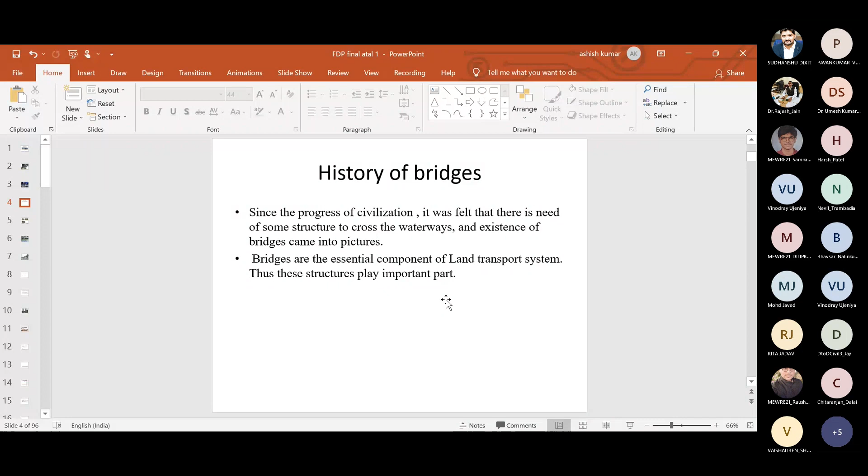Anyone? Yes, sir. Yes. Okay, so these are some...

If we talk about the Tarr Steps bridge, it consists of 17 giant slabs, totaling 180 feet long, and is considered the best example of a clapper bridge.

According to local legends, the Tarr Steps were built by the devil so he could sunbathe on the stones. The bridge has been damaged in recent years by flood waters but has been rebuilt. So that is a kind of bridge.

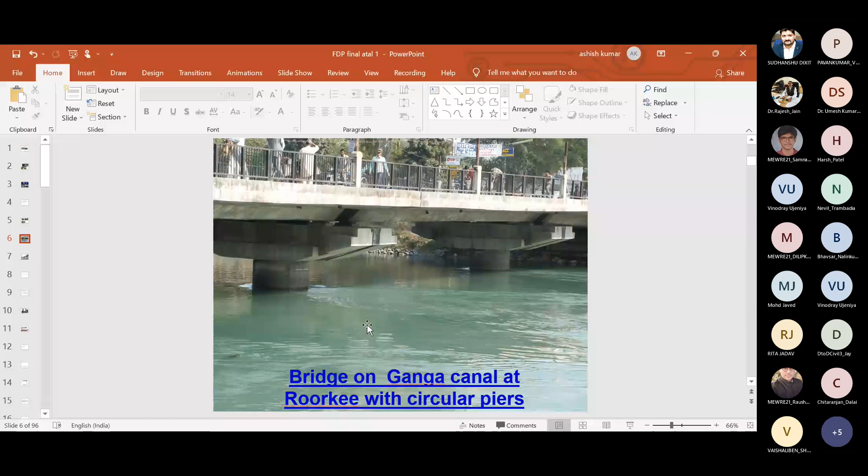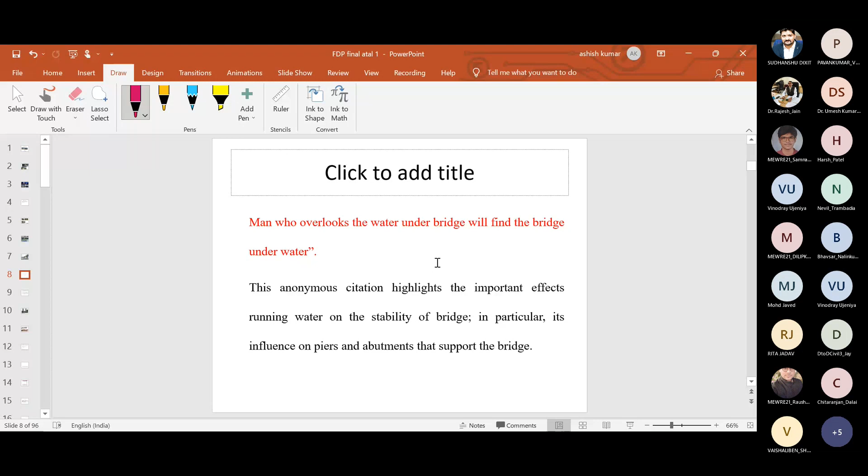So what I was discussing is that the man who overlooks the water under bridges will find the bridges underwater. This is a famous citation and quote that reflects the importance of running water on the stability of bridges. If we overlook the power of the water, the momentum of the water, and go with the design by overlooking the water phenomena, then probably we will lose our bridge and find our bridge under the water.

So that is what we were discussing about the phenomena of scouring, which occurs around bridge piers, and probably that is playing an important role in the safety and stability of the bridge. So that is one of the main causes of bridge failure - the flow around the piers and the abutment.

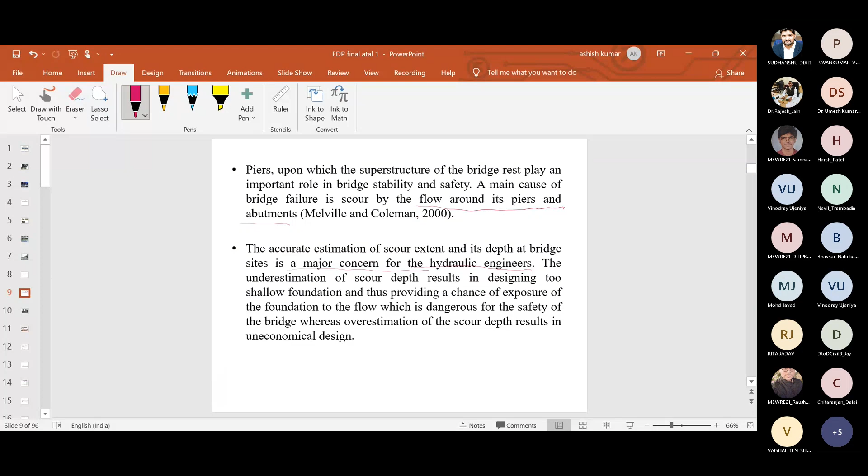Accurate estimation of the scour extent and its depth at the bridge site is a major concern for any hydraulic engineer. If we do the calculations for the scour depth and it is underestimated, what will happen? Our foundations will be exposed during the flood flow phenomena, which will ultimately be dangerous for the safety of the bridge. Whereas if we overestimate the scour depth, it will result in an uneconomical design.

So for study, I have taken the first study made by Wardhana and Hadipriono in 2003. They analyzed the failure of 503 bridges in the period 1989 to 2000 in USA, and observed that one of the primary causes of failure was due to flood and scour, followed by collision from vehicles. They reported that around 52.88% of bridge failures occurred due to flood, including the phenomena of scouring.

Similarly, one study has been carried out in India also - R.K. Garg et al. collected information on road and railway bridges, accounting for around 2010 bridges, with sources from print media, the internet, and other government officials' records. They collected data from 1977 to 2017, and as per their analysis, the failure of bridges due to flooding and scouring was more than 51%.

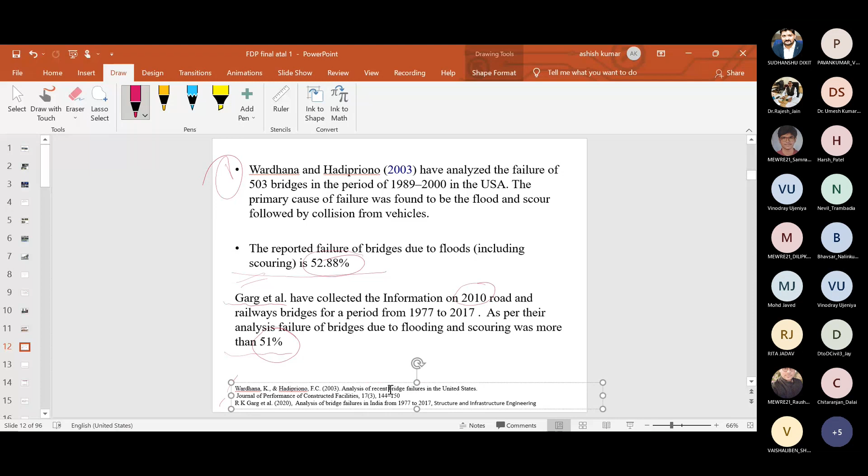So the concern about safety of bridges with scour is primarily due to these reasons: we still have inadequate knowledge about the scour phenomena, and we have inadequate data on bridge and abutment scour, particularly during the passage of flood. Lastly, the size of wagons and trucks and their frequency has significantly increased, which has increased the load on the bridges.

So that shows the need for sincerity while designing the substructure part of bridges. Whereas if you see, mostly when we are designing the superstructure part, we are taking care, we are using different softwares.

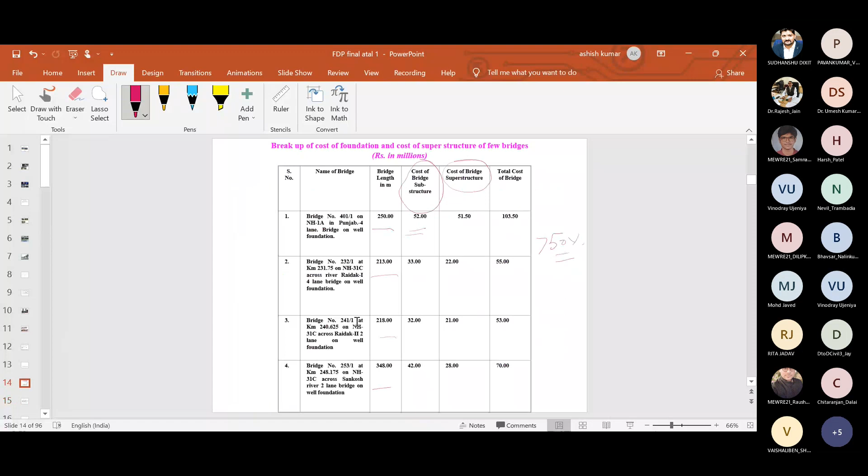Now we go with the phenomena of scouring, and we will then go further with the flow structures around the bridge piers. One of the main causes of bridge failure is scouring of the pier at its supports.

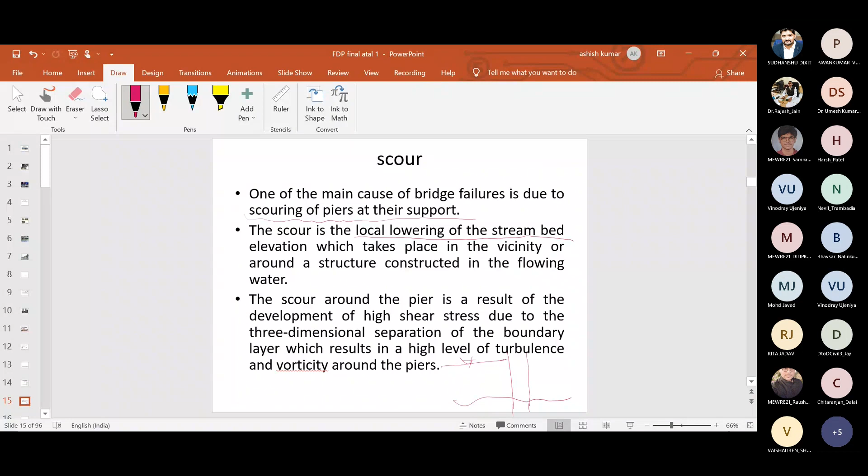What is scour? Scour is the local lowering of the stream bed elevation, which takes place in the vicinity. If you are having flowing water, and if we place our bridge pier, then erosion occurs around this structure. So this is basically a local phenomenon occurring in the vicinity or around the structures, generally lowering the bed level.

So the scour around the pier is a result of the development of high shear stress due to the three-dimensional flow separation of the boundary layer.

Now scour needs to be differentiated from the other term, degradation. Degradation takes place when the transport capacity of the flow for sediment is greater than the rate at which sediment is being supplied from the upstream. So if the supply of sediment from the upstream is less, then there is degradation and lowering of the bed level.

If this is the bed level, and this is the depth of flow, and sediment transportation coming is less in the flow, then what happens? Any river has its fixed capacity to carry the sediment.

So if it is having less sediment transport, suppose we have created some structures upstream of the bridges, like a dam or retaining structures, which has stopped the water carrying sediment, stopping its silt, then what will happen in the downstream of this barrier or dam or any other retaining structure?

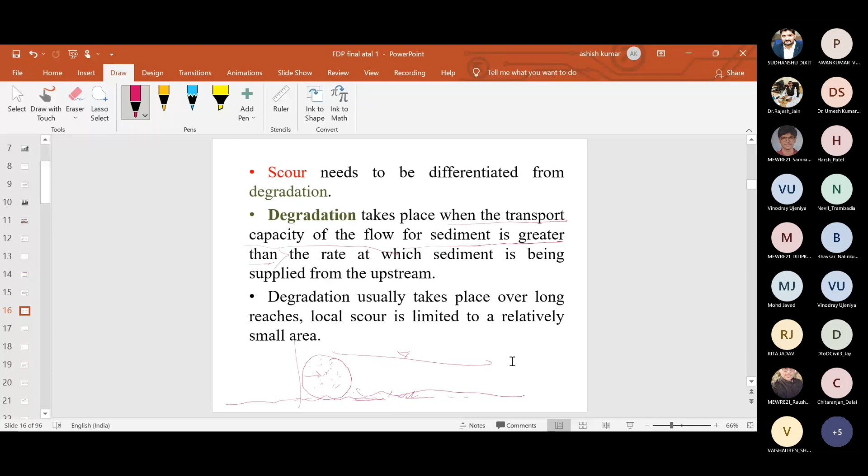So in the case of bridges in alluvial rivers, estimation of the correct depth of scour below the stream bed is important, as it is required in order to find out the overall depth of the foundation.

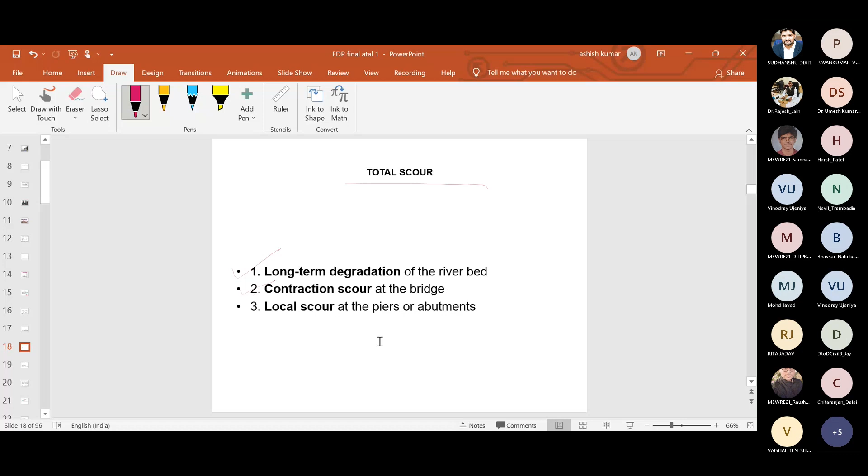Now we come to this: what is the total amount of scour? We have divided it into three categories. First is the long-term degradation, that is of the river bed; second is the contraction scour; and third is the local scour, which takes place in the vicinity of the pier or other structures. We will discuss each one by one.

So first we have aggradation and degradation. What is that? Aggradation or degradation of the stream bed elevation is basically a long-term phenomena, and these changes, as I told you earlier, are due to natural or man-induced causes. Suppose you create some structure like a dam, then as you have made some changes in the river phenomena, this aggradation or degradation will take place. This can affect the reach of the river on which the bridge is to be located.

Now if we talk about aggradation, it involves the deposition of material eroded from the channel or watershed upstream of the bridges, but is not considered a component of the total scour. If we go with degradation, that involves the lowering or scouring of the stream bed over relatively long reaches due to a deficit in the sediment supply from the upstream. This is the important part: there is a deficit in sediment supply from the upstream, and it basically contributes to the total scour.

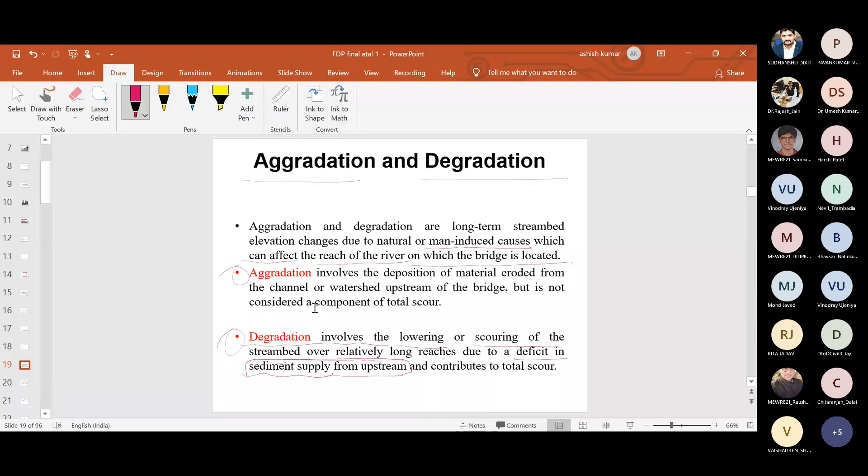Now go with the contraction scour, which is the second part here. Contraction scour is basically lowering of the stream bed across the stream or waterway bed at the bridges. This results from contraction or constriction of the flow.

Suppose this is the river here, and you constrict it by creating some abutment, and then you create some bridges here. So while you are creating contraction in the flow, what will happen? That will result in removal of material from the bed across all or most of the channel width.

This contraction scour is different from long-term degradation, in that contraction scour occurs in the vicinity of the constriction or bridges, and may be cyclic or related to the passage of the flow. So whenever there is a constriction of the river bed or river width, this phenomenon occurs.

The third type is local scour, which is the removal of material around the piers, abutments or spurs, and it is caused by acceleration of the flow and resulting vortices induced by obstruction of the flow.

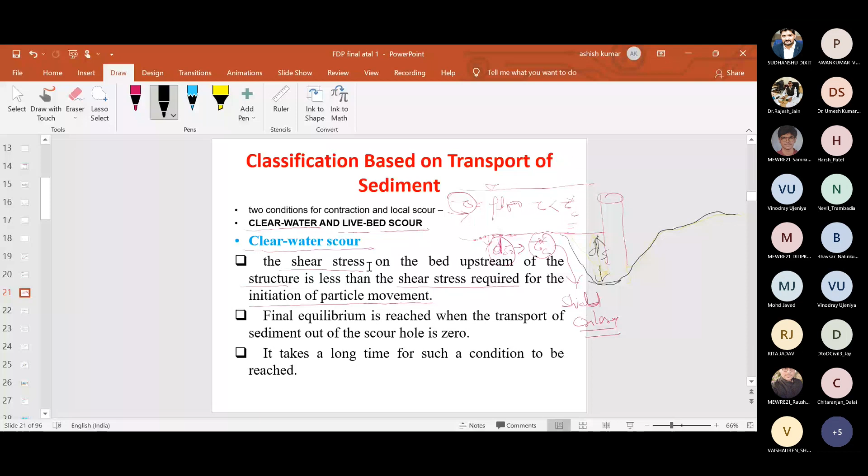So these are some typical clear water scour situations. First, we have a bed with coarse bed material streams. Second, the flat gradient of the stream during low flow, which also depends on how much slope of the bed you are having. Then the local deposits of larger bed materials that are larger than the biggest fractions being transported by the flow.

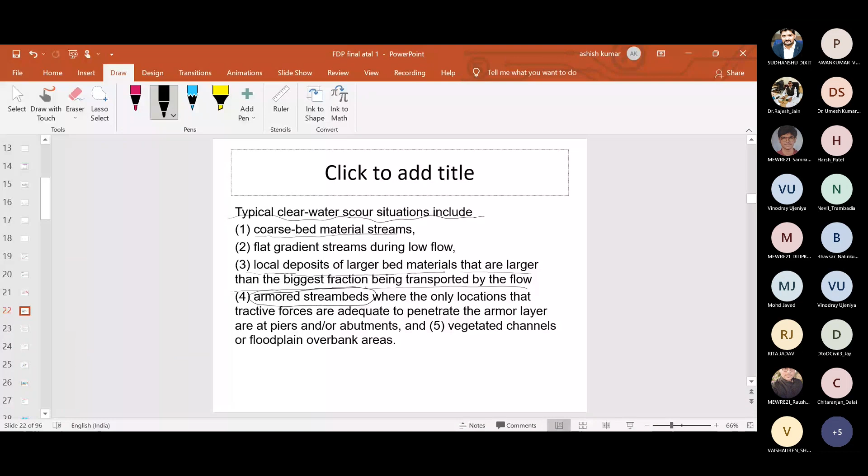And last, which is important, is armored stream beds, where only at locations are the tractive forces adequate to penetrate the armor layer. Normally armoring of layers means there is a deposition of larger particle size, and below that we have the smaller particles. In that case also there will be no transport of bed material to the stream. Also fifth, vegetated channels or the flood plain overbanks where velocity is very low.

Then we go with live bed scour, and here what is the criteria?

The shear stress of the flow is greater than the critical shear stress. That means this tau of the flow, denoted by tau naught, will be more than the tau c.

This live bed occurs when there is transport of the bed material from the upstream reach into the crossing. So this live bed scour is basically cyclic in nature: the scour hole develops during the rising stage of the flood and refills during the falling stage.

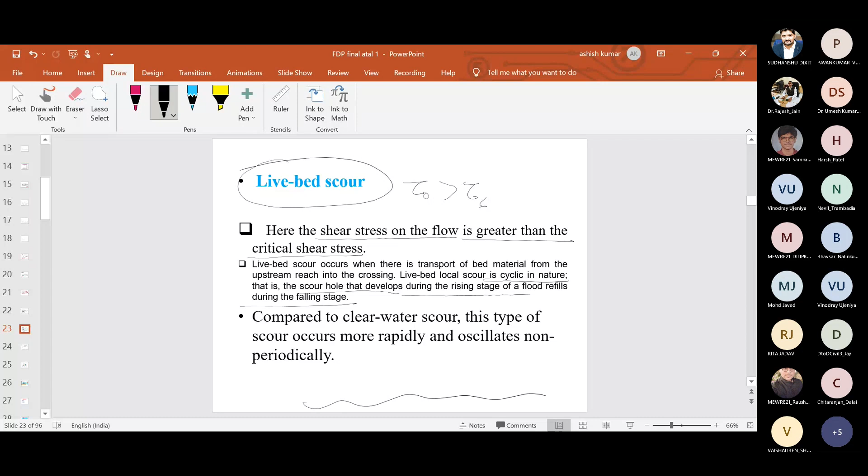So if you are having a flood situation, suppose this is the scour, and this is the river bed. When there is a flood, the flow increases, the velocity increases, the shear stress increases, and ultimately there is a development of the scour hole. When the flood recedes, the flow depth decreases, and this falling stage refills the scour hole.

So that's why this live bed scour is basically cyclic in nature, and when we compare it with the clear water scour, this type of scour occurs more rapidly and oscillates non-periodically.

So here is the diagram we have taken. On this side we have the scour depth, denoted by ds, and this is time. In case of the clear water scour, it takes place over a long period of time.

If we talk about the live bed scour, in this case the scour depth increases sharply compared to the clear water scour. Then, as I told you, there are fluctuations and oscillations as the scour hole is filling and refilling again and again.

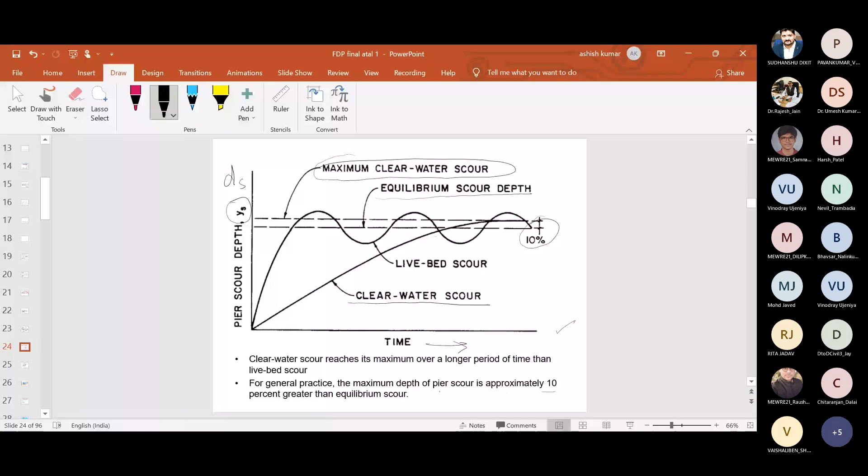So here the difference is that the average is taken as the equilibrium scour depth, while the maximum scour depth is reached in case of the clear water scour. There is a difference of about 10% here. So in general practice, the maximum depth of scour is approximately 10% greater than the equilibrium scour.

As flow approaches the pier, at the face of the pier the velocity becomes zero. Due to this, there is a stagnation pressure in front of the pier, and the water surface is increased. This increase results in the formation of a surface roller.

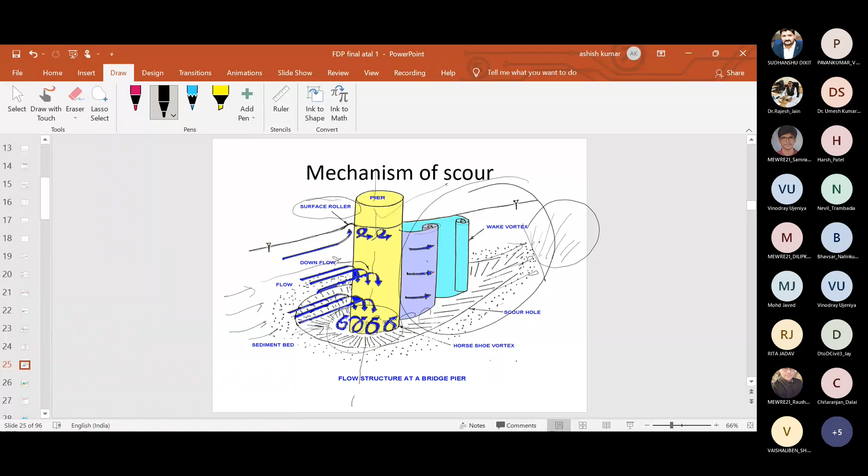So this is another three-dimensional picture.

How the horseshoe vortex is created here, and how it propagates downward, thus increasing the scour hole. On the upper surface you see the formation of... what is this formation? Anyone? On the downstream side, this is the formation of wake vortices. And on the upstream side, you can see there is formation of the horseshoe vortex. So this is the basic here.

There are a number of factors upon which the magnitude of local scour depth at piers and abutments depends. In terms of flow characteristics, we may have flow characteristics, sediment characteristics, and also pier characteristics. We may have different types of pier shapes which may vary along the length, different types of sediment, and different flow characteristics. So here we have given a number of factors.

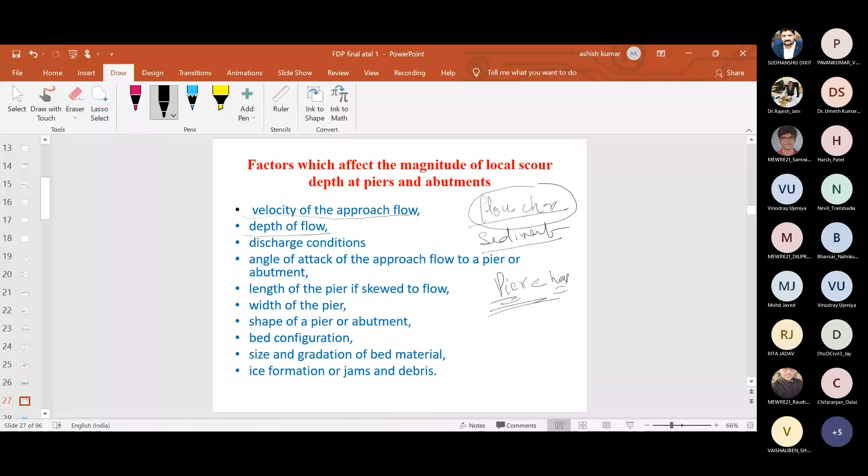That is the velocity of the approach flow, depth of the flow, the discharge conditions, and the angle of attack of the approach flow. So suppose this is a circular pier and this is the flow condition. In case this is a circular pier, then there is no problem because it is symmetrical.

But if we are having this double-D shape structure here, then what will happen? In this case the angle of attack is 0. But in due course of time, due to the meandering process, the river may change its direction, and then the flow direction may be like this. So basically the angle of attack is changing.

So there are factors like this which cause change in the depth of scour. Then what is the shape of the pier and the abutment? What is the bed configuration? What is the size of different bed materials, size and gradation? Then there are some obstructions like ice formations, jams of debris. So these are various factors, and I am not going to discuss all of them because it is a different part to discuss how the scour depth is affected by all these factors.

So here this depth of scour we have divided, shown here that it is a function of pier geometry, sediment characteristics, flow characteristics, and fluid characteristics. As we have written, fluid characteristics do not change much from one situation to another, if we talk about the viscosity of the flow, for example.

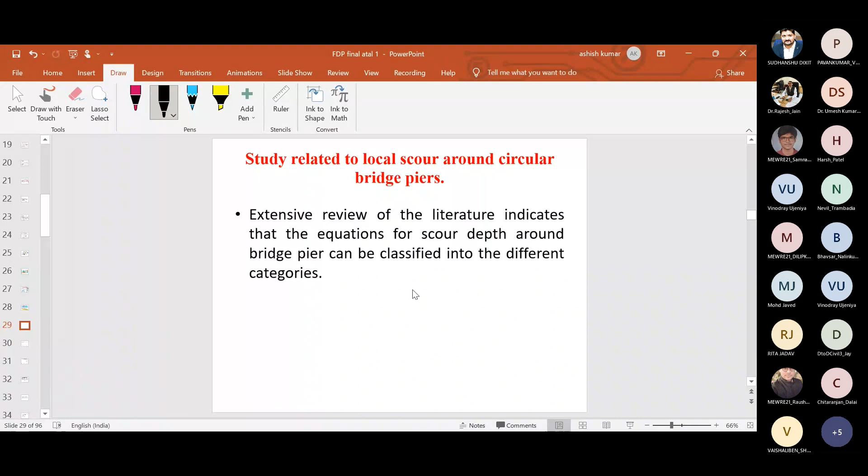So earlier this work is started, and this is Laursen and Toch, who was probably the first to work on the flow field and the estimation of the scour depth around the bridge pier.

So he basically started this work, and at that time you can see that we don't have so much laboratory facilities like today we are having the latest instruments. He just used a simple gauge in order to find out the scour depth.

But as the time passed away, now we are having the latest instruments like the acoustic Doppler velocimeter, and prior to that we were having the hot wire anemometer, and so on. There are various things to find out the depth. So this is probably the first one to work on finding out the depth of the scour.

Various equations after that were given by various researchers, and the basic concept was in terms of depth of scour divided by the depth of flow, and this B is the width of the pier. So we have written here. I'm not going to explain this. This is all laboratory experiments done by various researchers.

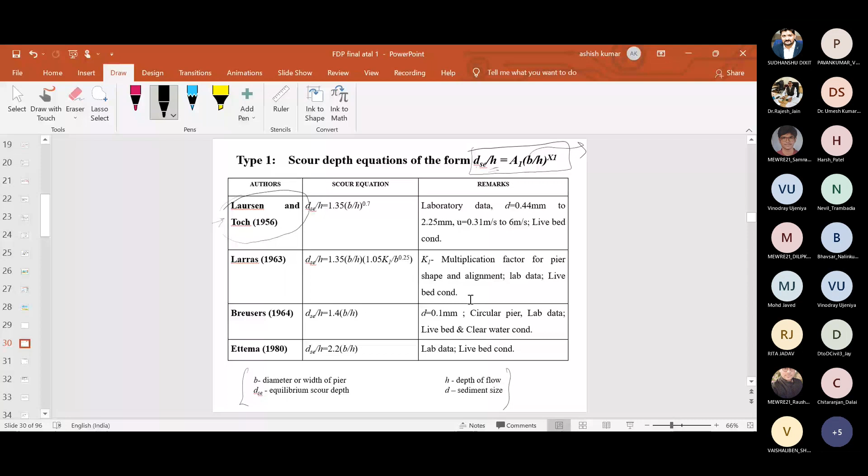And this is type 3. Here you can see that again some equations have been summarized in this form, where we have taken the Froude number and the Reynolds number of the flow. And also we are having this.

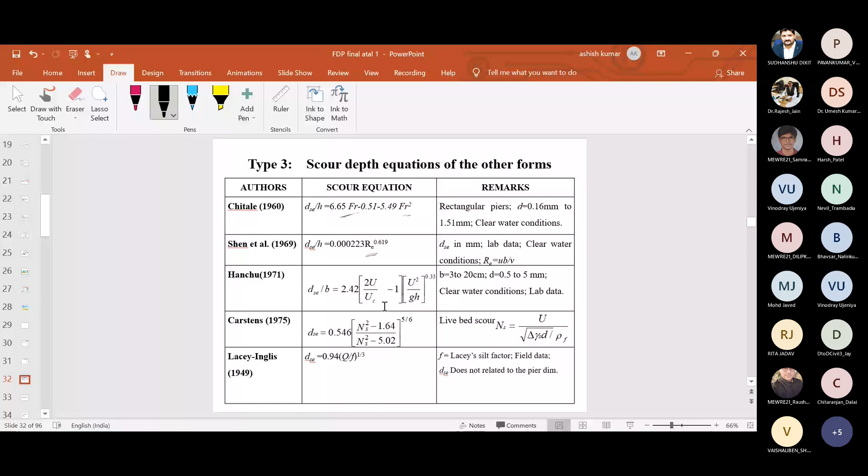So now coming to this part. After that a lot of research has been carried out on the estimation of the scour depth using different sediment, either in live bed condition or in sediment, or in the clear water conditions.

And also some work has been carried out in order to find out the time variation of the scour depth, how scour depth increases with time.

So here I have named some researchers starting from Chabert in 1956, then Melville, Ettema, Yanmaz, Kothari, Oliveto. And this is myself, the work has been done with my supervisor Kothari and Kumar. So a number of literature you can find in this field.

Now I am only discussing here two equations, and one of those is the equation which is used to get the pier scour in USA, and this is heavily influenced by the Federal Highway Administration. So I am only discussing one part of that.

It is a complete manual, and anyone from you, if you are interested to work in this field, can freely download this HEC-18 circular. So kindly type it in Google and you will get this freely downloaded. Kindly go through that if you want to work in this area.

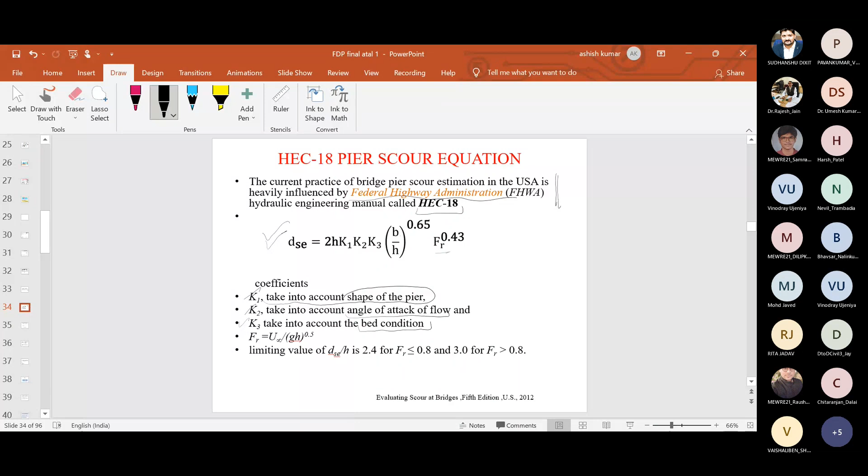So this is HEC-18 pier scour equation. This is the basic equation which has the coefficients K1, K2, K3, that take into account the shape of the pier, then angle of attack, and the bed conditions. Then this B is the pier width, and H is the depth of flow, and this Fr is the Froude number. So these are all the criteria given here, and these are basically the conditions here.

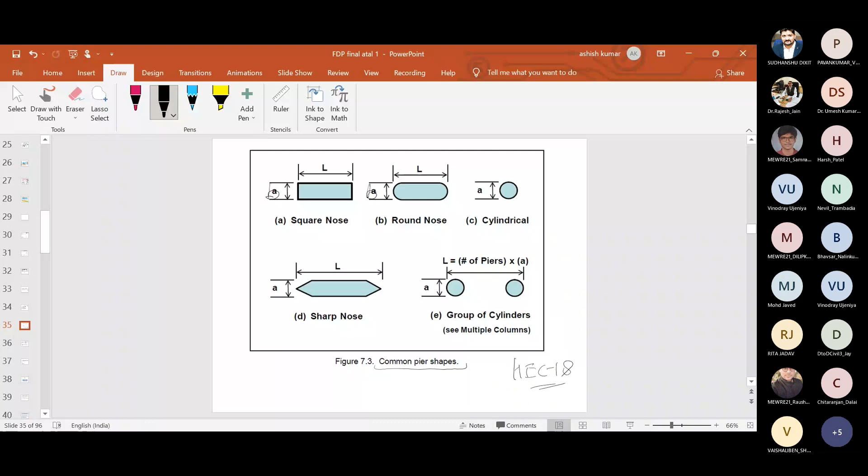What are the common pier shapes given in HEC circular 18 -- here you can see this, you may write here, this is written here as A, you please may convert it as B. Okay, this is all B. So these are the different shapes, and this is the correction factor table, that has been retrieved from HEC circular for your reference, for your guidance.

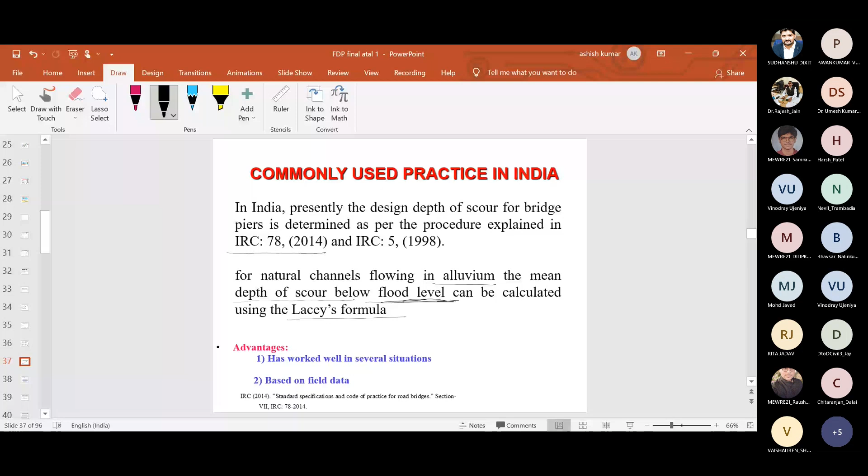Now next we go with the commonly used practice in India. In India we basically find the design depth of scour as per the procedure explained in IRC code 78 and IRC 5. For natural channels flowing in alluvium, the mean depth of scour below flood level can be calculated using Lacey's formula. This is the reference I have given, the standard specification and code of practice for road bridges.

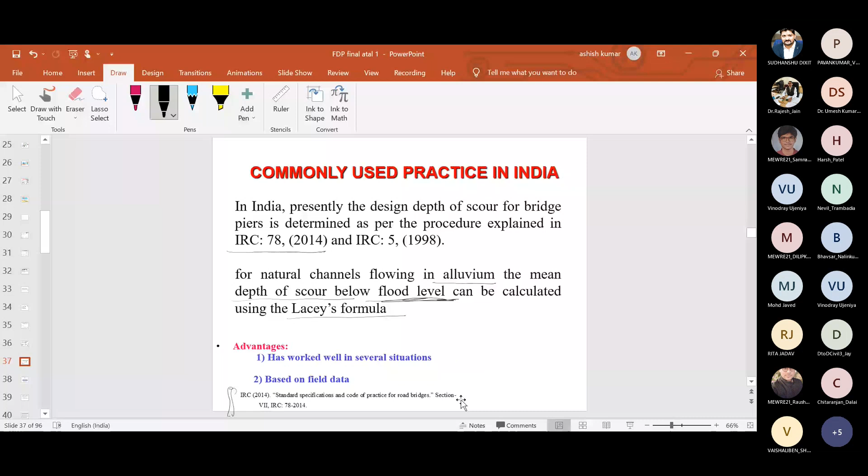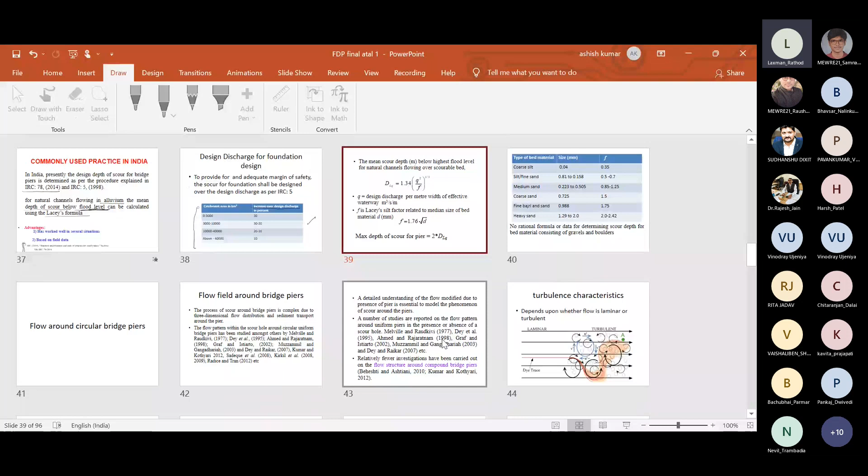So this is the formula by which we can find out the mean scour depth below the HFL for natural channels flowing over a scourable bed, where Q is the design discharge per meter width of the effective waterway, and F is Lacey's silt factor. All of you know these two equations very well. The maximum depth of scour will be 2 times this dLQ.

This is the type of material referred to in the code, and this is the sediment size. The code has provided directly the value of F you can use, varying from coarse silt to heavy sand. It is also given that there is no rational formula or data for determining the scour depth for bed material consisting of gravel and boulders.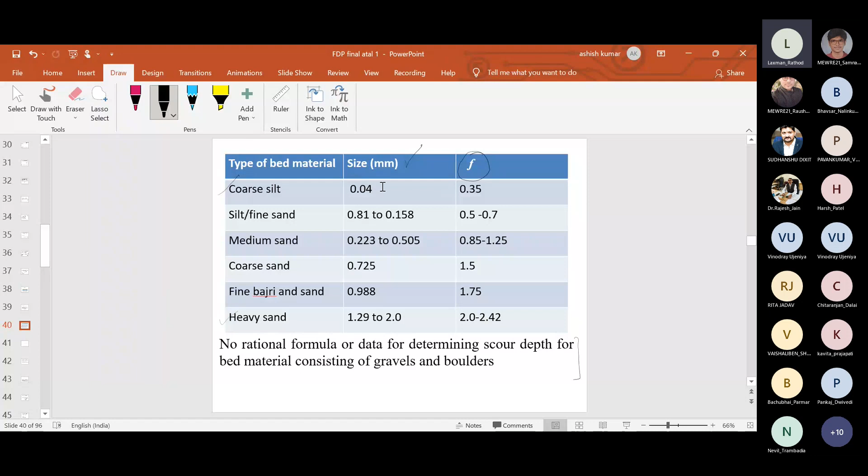Now coming to the part with the flow around circular bridge piers. This flow field, the process of scour around a bridge pier, as you have seen earlier, is basically a complex three-dimensional flow distribution and sediment transport around the pier. There is a complexity here, a three-dimensional flow distribution as the water reaches close to the pier.

So you have seen the mechanism of scour. If we take the flow pattern within the scour hole around circular uniform bridge piers, it has been studied by various researchers, including Melville and Raudkivi, then Dey et al., Ahmed and Rajaratnam, Graf and Istiarto, Dey and Raikar, then by ourselves also - Kumar and Kothyari - and many others. So the phenomena of this, how to get the flow field and understand it around the pier, has been studied by several researchers.

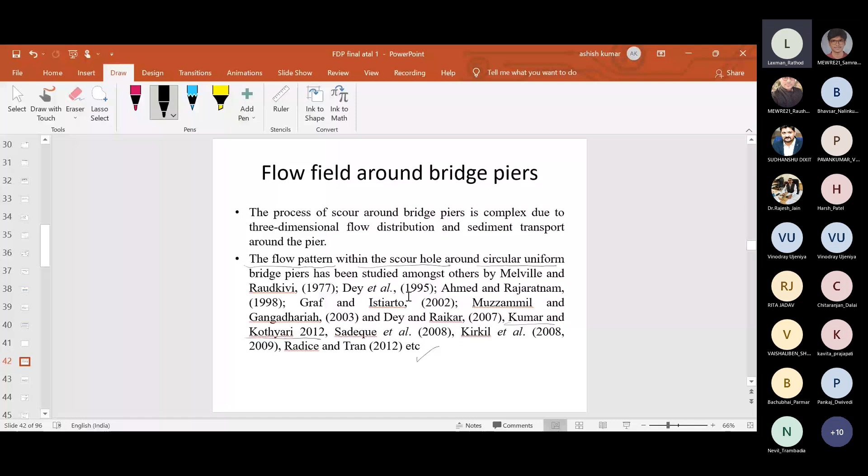So in the coming slides we are going to discuss how we can get this flow field, and why there is a requirement for it. A detailed understanding of this flow field, modified due to the presence of the pier, is essential to model the phenomena of scour. As I told you, a number of studies have been carried out, but relatively, if you talk about compound bridge piers, which we'll discuss in the coming slides, very few studies have been carried out. So today we will be discussing this also.

So first let's go with the phenomena of turbulence. All of you know what turbulence is. It basically depends on whether your flow is laminar or turbulent - if your flow velocity is very less, such that your Reynolds number is low. In open channel flow, whether flow is laminar or turbulent depends upon the criteria of the Reynolds number.

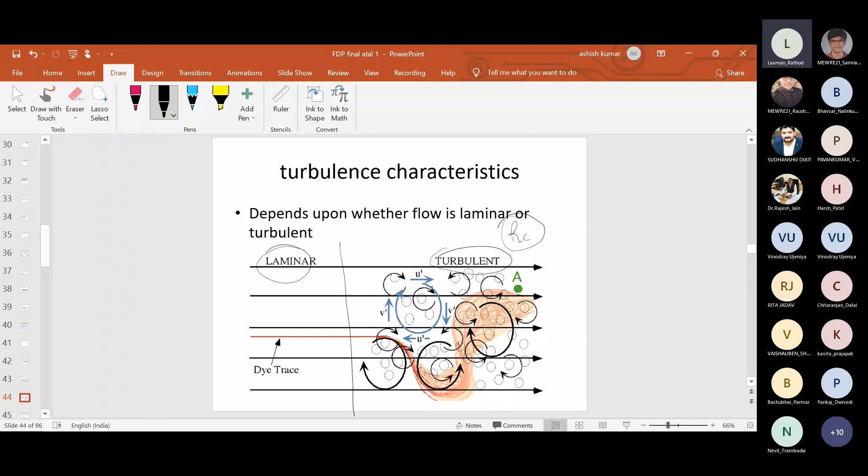Can anyone tell what is the criteria for laminar and turbulent flow in the open channel? What should be the Reynolds number? Sir, less than 500 for laminar and more than 2000 for turbulent. Good. So normally if you have very less velocity, you're working with this Reynolds number, that is rho d v over mu, or v over nu, where nu is the kinematic viscosity, and d is basically taken as the characteristic length.

Okay, and in this case, when we are working with the open channel flow, you can take a depth of flow, and v is the velocity here. So if the velocity of flow is very less...

Normally what is happening in open channel flow is we are having turbulent flow, and this turbulence becomes more prominent or more dominant when an obstruction is encountered or placed in the flow.

Suppose this river is flowing and there are no obstructions, although you are having a turbulent flow as Reynolds number is more than 2000, the turbulence intensity will not be high. But if you place some obstruction...

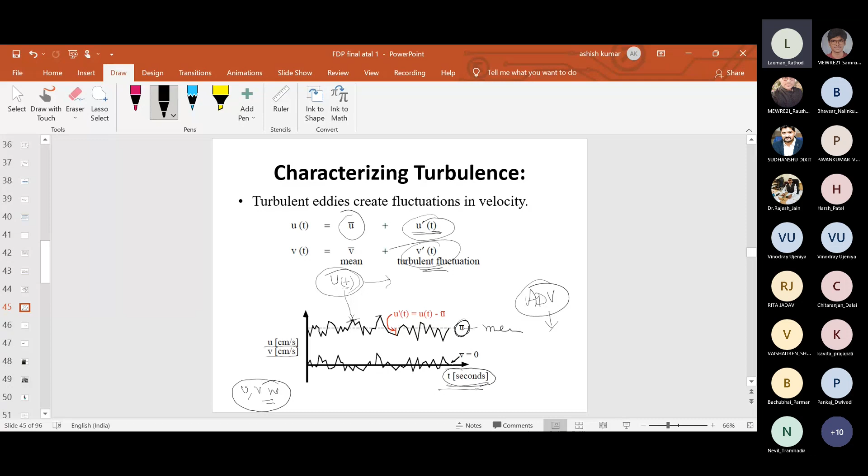With this u mean, the difference at any instant between the velocity ut and the mean is treated as u prime, v prime, or w prime. These are basically the fluctuations, and the more turbulence there is, the more variation and greater magnitude of u prime, v prime, or w prime you will get.

So that is how you can calculate mean velocities. We have defined this only in terms of u, but you can similarly find it for v and w components also, giving you three-dimensional u, v, and w perpendicular to each other. That is how you find the mean velocity and turbulence fluctuations.

The third aspect is turbulence strength. The intensity of any turbulence can be found using RMS, that is u prime into u prime.

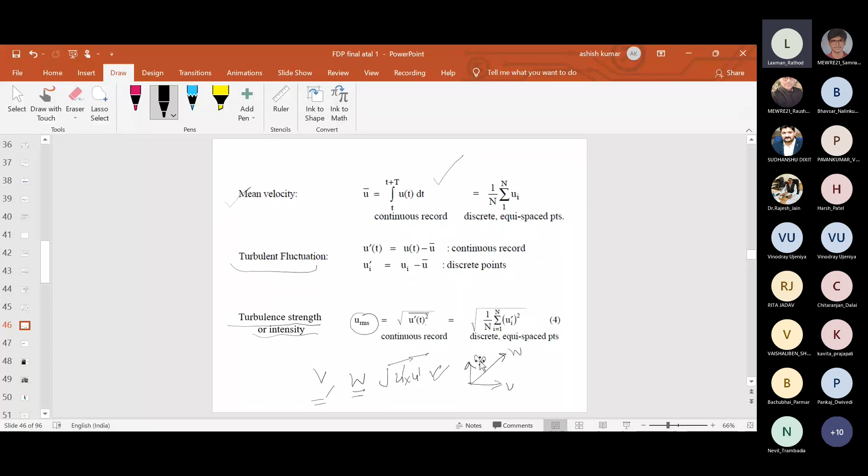I will be showing you all this data which we captured with the help of the instrument. These are all turbulent characteristics by which we define turbulence intensity, in the u direction, v direction, and w direction, and these are all the Reynolds stresses, which we will be discussing.

So now we just carried out some experiments in order to understand the flow behavior or flow field around the pier in the laboratory. This is the laboratory flume at the Department of Civil Engineering, IIT Roorkee, where the experiments were carried out during my PhD work.

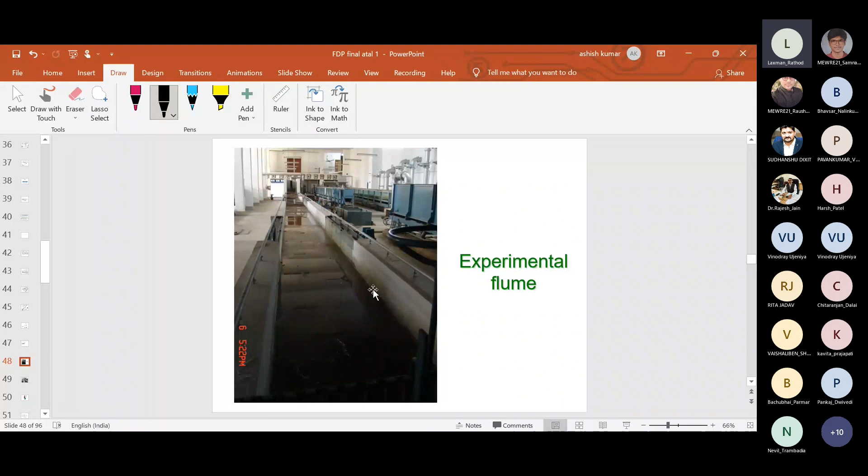And this is the next figure. You can see the flow running here. This flume was basically 30 meters in length, 1 meter wide, and the depth of the flume was 0.6 meters.

The flow was adjusted here. This is the inflow of water, and there was a honeycomb structure, a straightener, so that the turbulence of the flow coming in gets dampened down, giving more or less flow without turbulence.

In the second case we used compound piers, which have a well foundation or excavation over which we have the pier. These two types of geometries were used to see how the flow alters due to this obstruction, that is due to the pier.

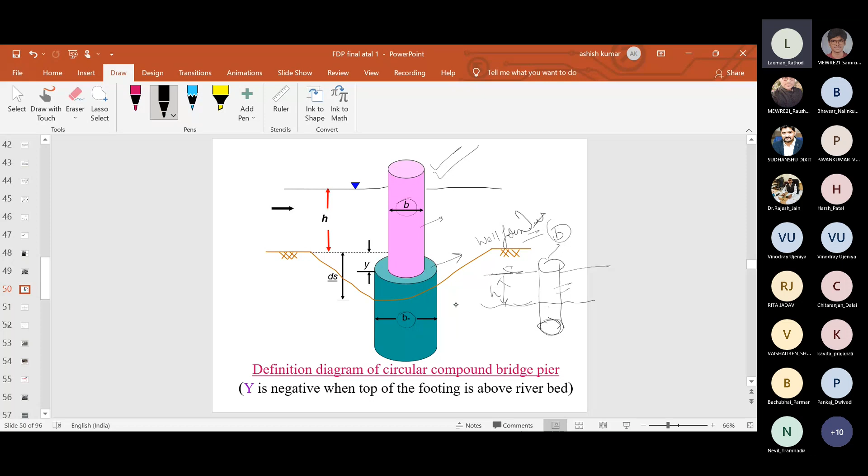So we have taken three conditions here. We have treated Y as negative when the top of the foundation is above the river bed. We have used four conditions here.

In the second condition, what we did: this is our foundation, and this condition has the top of the footing matching with the river bed, with this being the depth of flow. So this is the condition Y equals 0.

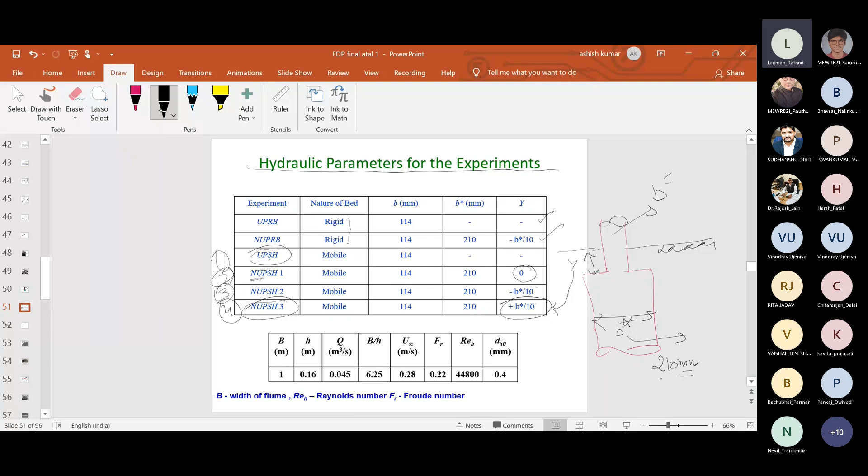In our experiment we used B star as 210 mm, and B as 114 mm. Now in this condition, we will discuss this further.

In this condition, we exposed our foundation like this, so now Y becomes negative here, relative to the bed level. So these three conditions of the non-uniform pier, and this one condition of the uniform pier scour hole, will be discussed in the coming slides.

This is the scour hole developed around the uniform pier, which has been cemented. After draining out the water, we carried out the flow characteristics around this scour hole, around this area.

So what we basically did, we drained out the water, then we sprinkled a light solution of cement in the scour hole area and surroundings, so that further scour holes do not develop here.

This is the scour hole geometry which was developed during the period when flow was run for 7 hours, and in this 7 hours we developed the semi-equilibrium scour hole.

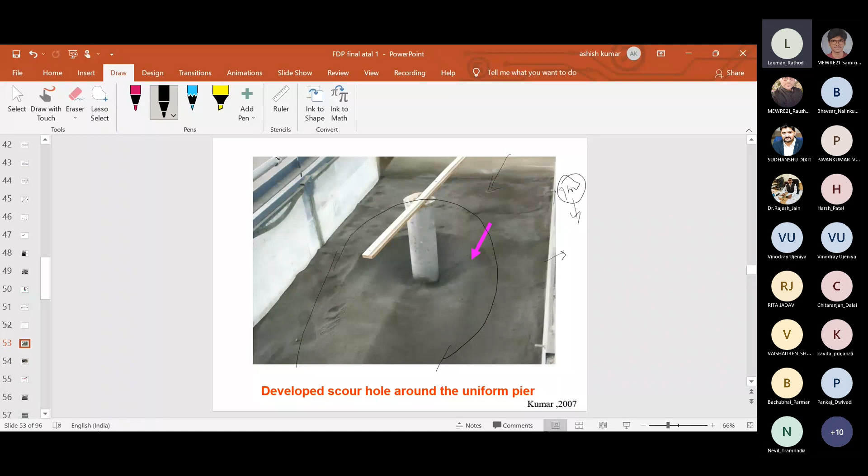Here you can see this is the direction of flow, and this is basically the plan, and this is the pier. This is the vertical plane. So here you can see that in order to get the flow structure around the uniform pier, as in this case, we have taken measurements.

We have taken 7 planes, at intervals up to 180 degrees at an interval of 30 degrees, and the remaining part will be similar, so that was left out. In each vertical plane we have taken the vertical distribution of the velocity for the overall depth of the flow.

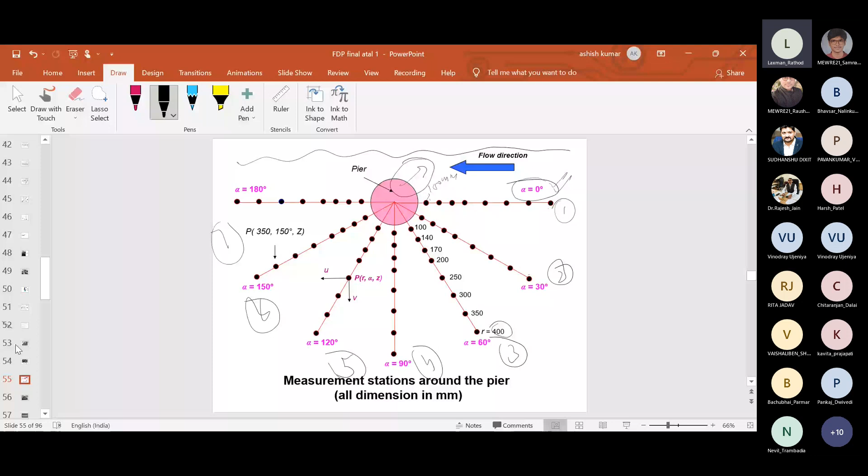Okay, so now just wait here, I will show you that. So now suppose this is the pier structure.

This is the pier structure here, and this is the river bed or channel bed, and this is the scour hole going up. If this is the direction of the flow and this is the 0 degree angle, then what we did, we have taken the vertical profiles here. So if this is the depth of the flow, we have taken the vertical distribution of the velocity.

We have taken different verticals. We have divided the entire flow area into a number of cross sections. If you take this as the center, then this is at a distance of 100, then 140, then 170, and we go up to 400 millimeters, or 40 centimeters.

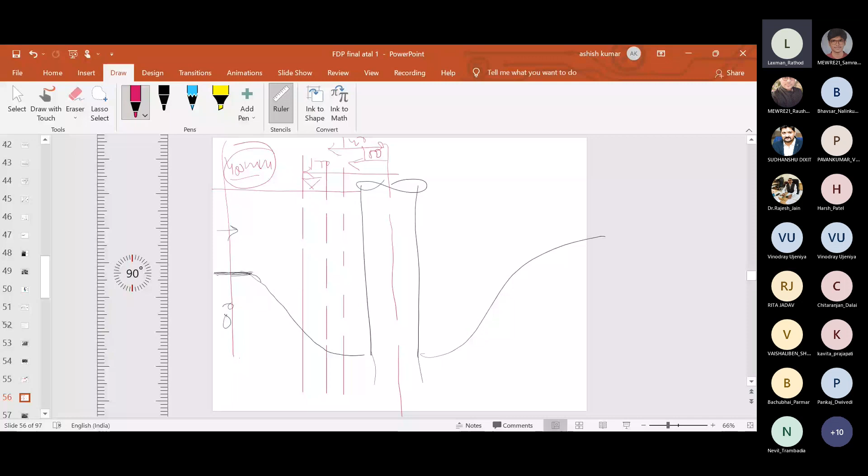We tried to cover the entire scour hole, and these are all vertical profiles. We took the first measurement at a minimum distance from the bed, 4 millimeters. Then at a vertical distance of 1 centimeter, we took the velocity measurement components U, V, W. That was taken at all the levels.

What we did was use the down-looking probe, and we got the values. We systematically raised our probe up with the help of the instrument, which you will see in the next figure.

This is basically the setup which was created in order to get the flow field around the scour hole, and this is a compound pier. This is the foundation, and this is the pier on top. This is the acoustic Doppler velocity meter, and this was the arrangement by which we could move our instrument down to the scour hole and up from the scour hole.

So we just move the acoustic Doppler meter down and down, then we move it to this area, this area, this area, and this area. Here we could read the distance in the x-axis. So this is the x-axis, this is the y-axis, and perpendicular to that is the z-axis, where we get the flow component.

So here you can see that we are capturing the velocity fluctuations within the scour area. That data is recorded with the software provided by the Nortek ADV, and here you can see that we are recording the continuous data with this SNR range.

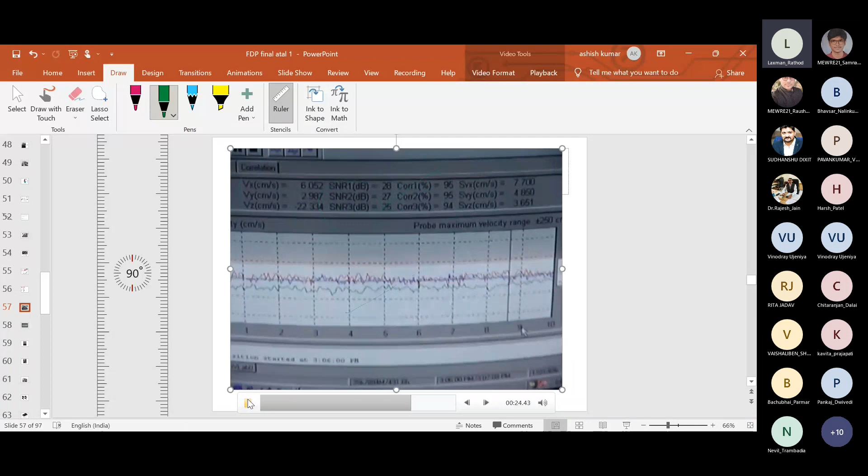So the data is recorded in the software, then this is processed. This is the illustration of the measured velocity component. You can see that all three components are recorded in the x direction, y direction, and z direction. Here you can see the velocity vx, then vy, and then this is vz. And we are again having some signal to noise ratio and correlation ratios.

So readings were taken around all the vertical planes, 7 different vertical planes. This is an electronic bed level recorder, which records the depth of scour. Here you can see the photographic view of this bed level recorder from the Netherlands while taking the measurement of the scour depth at the upstream nose of the circular compound bridge pier.

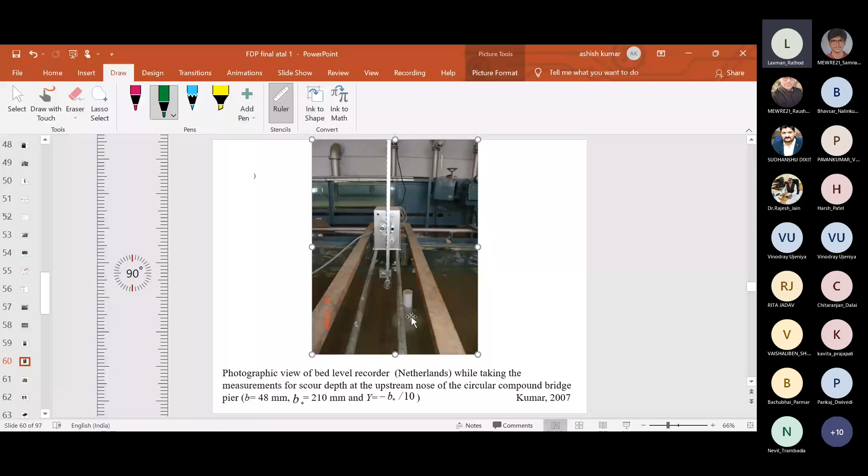So this is the gauge by which we have measured the depth of flow. This is the end of the flume.

Excuse me, sir. Excuse me, Ashish sir. Hello, sir, how many instruments have you used there?

A total number of 6 experiments were conducted around 6 different pier geometries.

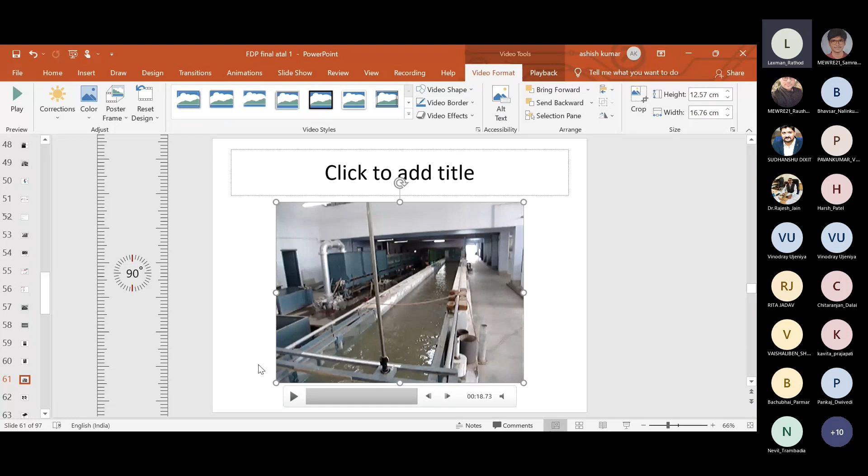Okay, so you can see here. Sir, actually I want to know the name of all the instruments you have used.

Oh, this is the acoustic Doppler velocity meter. First, I used it to find out the velocity fluctuations and velocity measurements. And second is the bed level recorder, which records the scour depth.

Okay. So 2 instruments. Okay, sir.

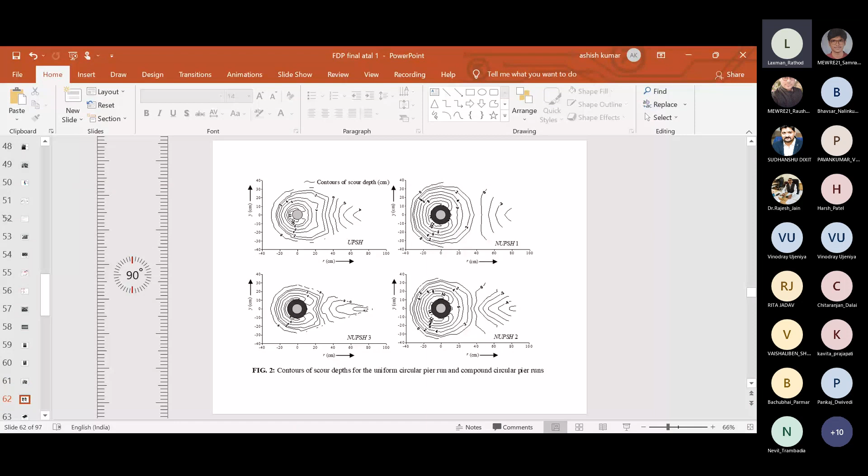Okay, so just here you can see that. So we were discussing about the 4 experiments. Here you can see these are basically contours which were drawn with the help of data collected around the scour hole, and these were the contours created. This is for the uniform pier, and this is the pier you are having.

This is the condition when we are having y equal to 0, and this is the scour geometry when we are having y negative, that means above the footing is above the bed level. And this is what we have when we are having footing below the bed level. So you can see that the extent of the scour hole is now less in comparison to when we are having the uniform scour hole.

So when the footing is basically, if this is the bed level, if the footing is below the bed level, then the extent of the scour hole gets reduced, and if this is the water level here, then what is happening? Some extent of this vortex is resting on this area also, thereby reducing the strength of the vortex.

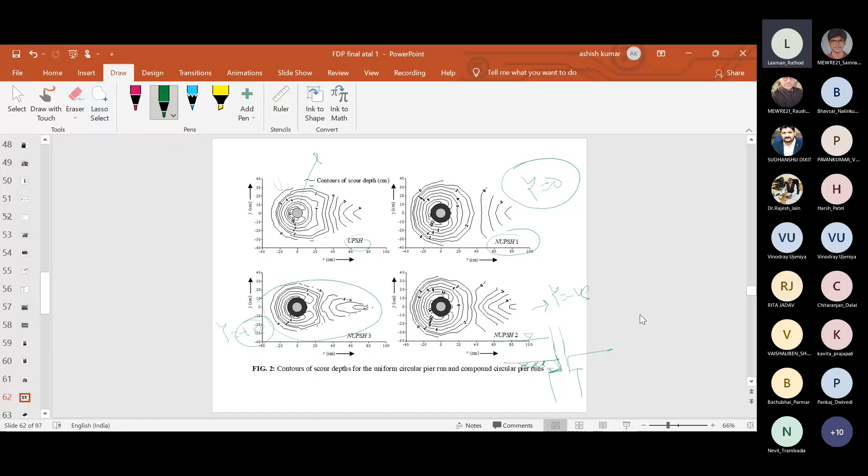So that we will discuss more in the next lecture on the 9th. Okay, so here this is the geometrical configuration of the scour hole around the compound bridge footing, and that work has been created with the help of the software Surfer. So that is showing the scour hole here, and here is the deposition on the downstream part. This is the direction of the flow.

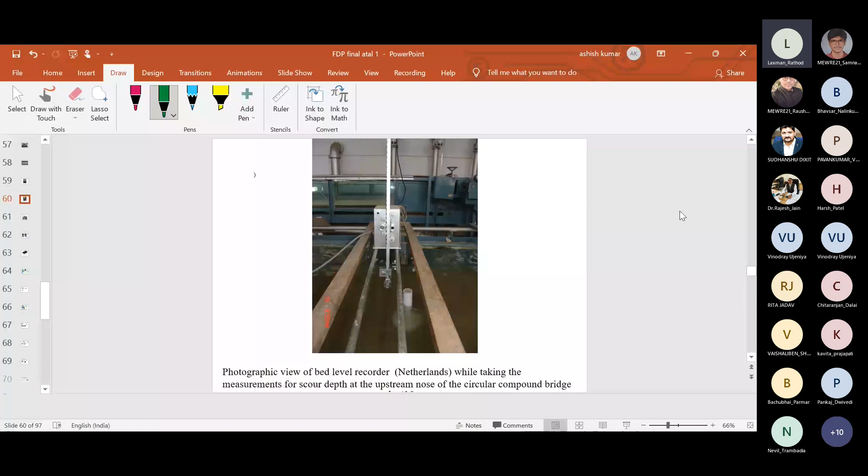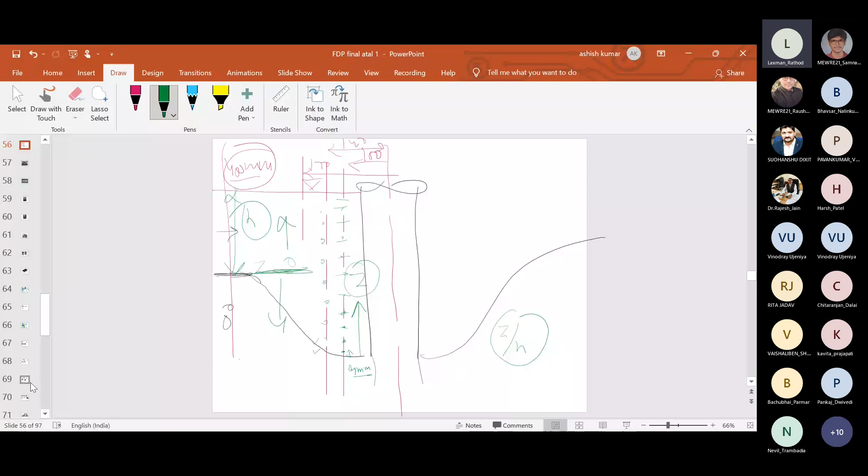So this is basically z, and this is the total depth h. We have normalized z by h, and this level is considered as z, the 0 level. Below this we have different values. So here you can see in this figure, above this is taken as positive, and below is negative. So z by h is negative below the zero level.

Now if you see the first figure, some data is lying with negative value. U by U infinity is negative value, so this is all negative value within the scour hole, because this is below the bed, so this is the scour hole area. While above the scour hole, you can see that all these values are positive. So in the plane, what is happening here?

Here value is R 100, then it is increasing in size with these symbols. This value is just close to the pier, and here you can see that when it is close to the pier, the velocities get reduced, and also within the scour hole we are getting the negative U component.

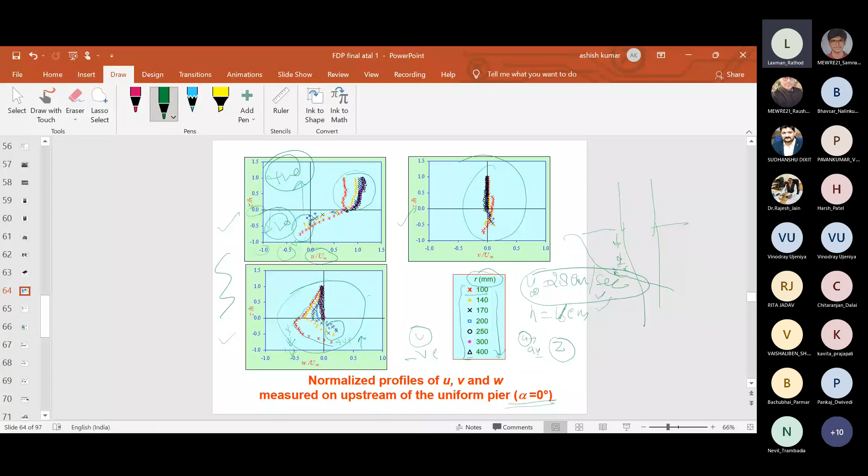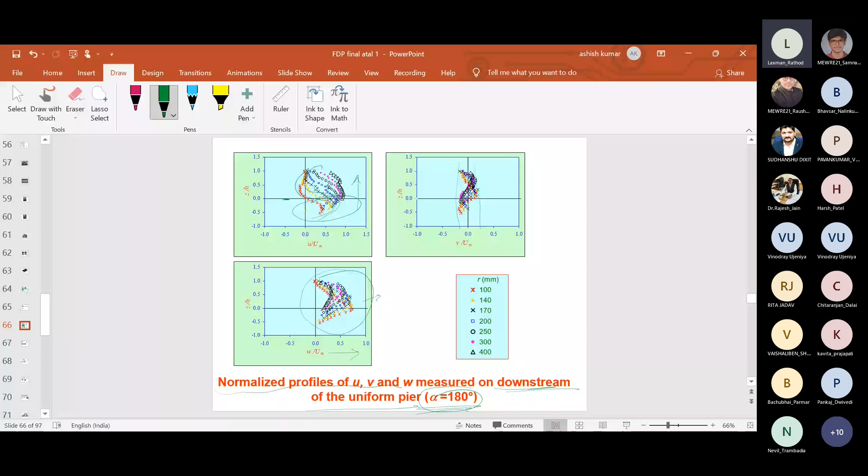Now, in this plane of 180 degrees, what is happening here is there is an upward flow in the downstream region. So all values of W are positive, meaning there is an upward flow of the W component.

Similar observations were also noticed by other researchers at this plane, just behind the pier. Just behind the pier, what we are observing is that this value is 0.72 times the approach flow velocity, and since it is positive, it is in the upward direction.

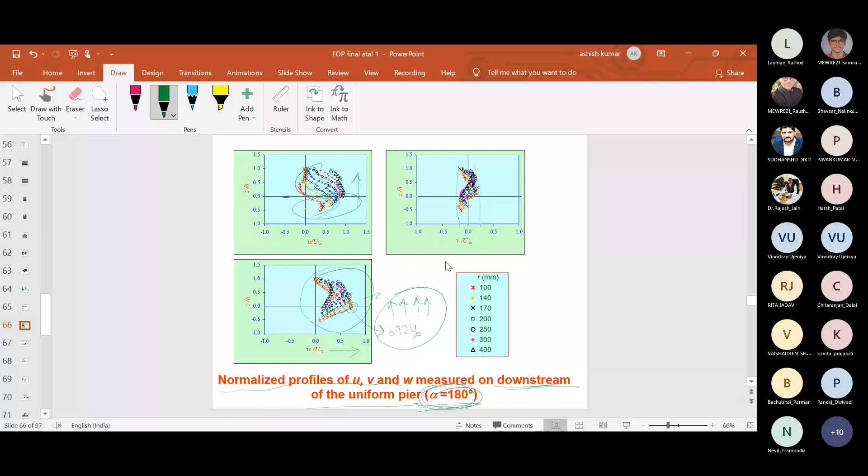While what we were dealing with before had a scale of 1 to 8, here you can see that the turbulence in the wake region, at the 180-degree plane or downstream plane, is more when compared with the upstream region or the 90-degree plane.

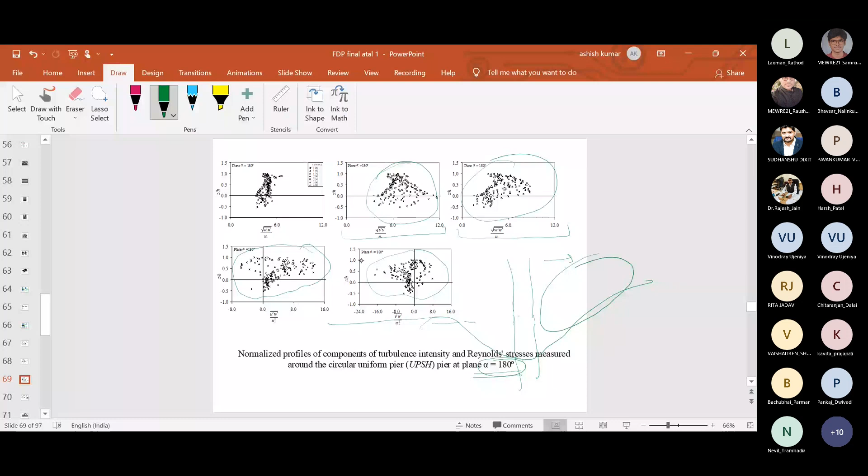So all of these do not show any conclusive trend, but the flow on the downstream side -- if this is the downstream side here -- in this downstream region, the flow is more turbulent compared to the upstream plane.

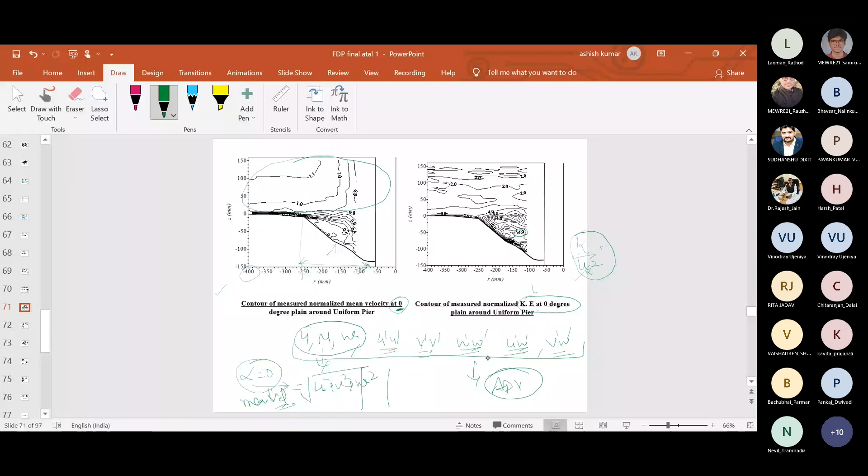If you go with the kinetic energy contours, then what we say is that the turbulence - here you can see we have the value, this normalized value is K divided by U star square. This normalized value, you can see the magnitude is 14 within the scour hole. So this is showing the turbulence intensity here, while above here you get lesser values.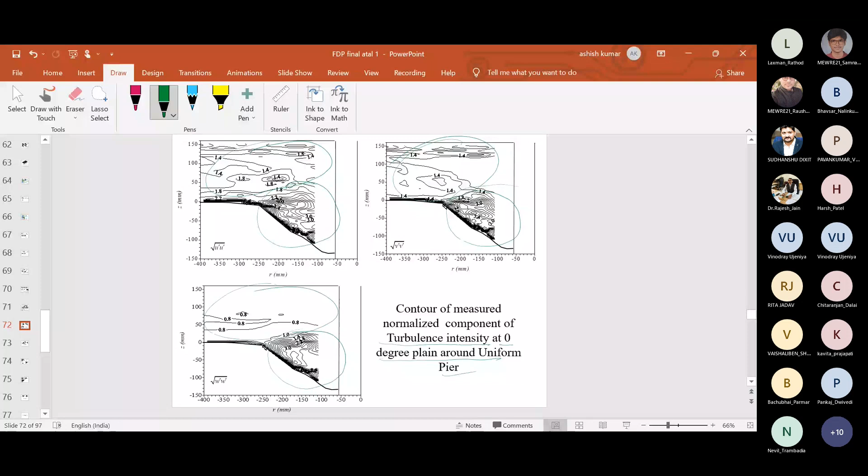Now go with this 180-degree plane, just downstream of the pier. Here you can see this is the scour depth here, and this is the total depth - the depth of scour on the downstream side. And this is what we have for the component of the mean velocities here.

Moreover, as you move away from the flow, this component is increasing. That means the effect of the pier is diminishing on the downstream side as we move away from the pier. This is basically the normalized value - 0.9 means you are approaching the approach flow velocity, that is 28 centimeters per second.

Now here are the kinetic energy parameters, and you can see this is more intensive - contours having a magnitude around 80 and so on. As you move away, these contours get lesser magnitude. Also, when you compare it with the 0-degree plane, you can see that the wake region is more turbulent compared with the upstream area.

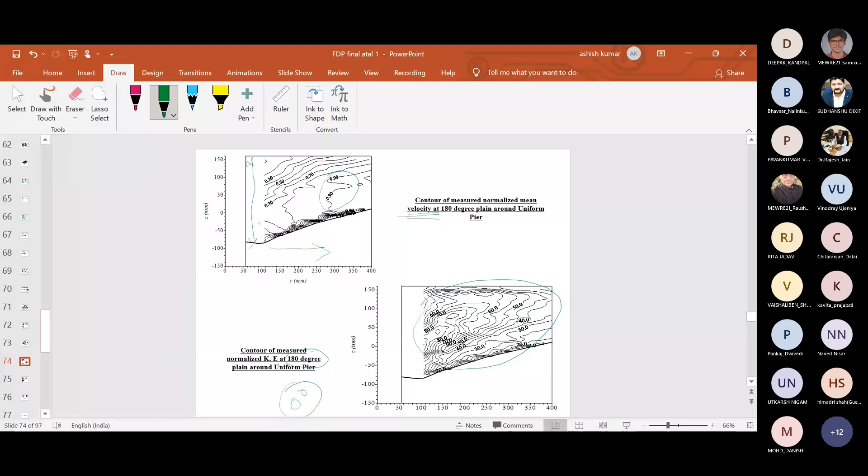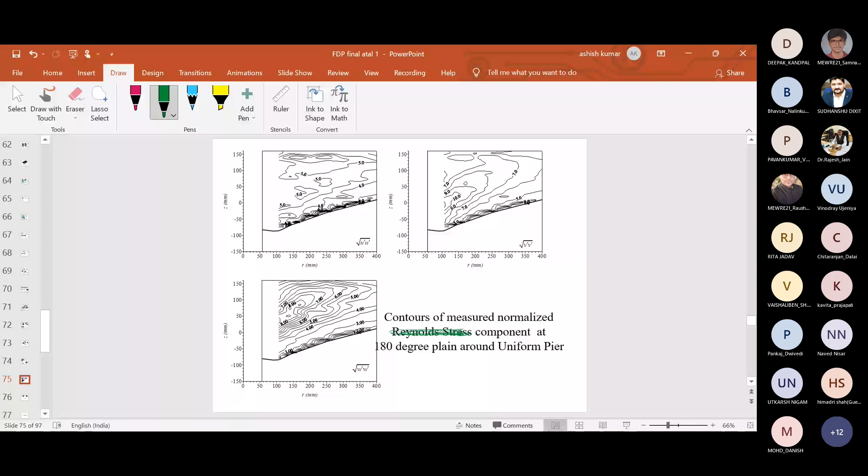So now this is again the Reynolds stresses which have been computed and normalized - wait, this is not Reynolds stresses, this is the turbulence characteristics for the U component, V component, and W component. You can see here the W component shows a higher magnitude, and these are the Reynolds stresses. You can also see that the Reynolds stress values have a higher magnitude when compared with the 0-degree plane.

So that is what we have done here regarding the flow characteristics and the flow parameters. The next coming slides show the comparative study of the flow field. As I discussed, we have taken flow field measurements around 4 different pier geometries, so the following 4 or 5 slides explain the comparative study of the flow field parameters here.

So this is what we have done here. We are making a comparison of the individual components. This slide is basically showing the U component of the velocity, and here you can see the notation chart we are using. So we have 4 different pier geometries.

With the different location of the piers: y is equal to 0 means at the river bed, footing is above the river bed, footing is below the river bed. So this is below bed, this is above bed, and this is where y is equal to 0 at the bed. This is for the uniform pier.

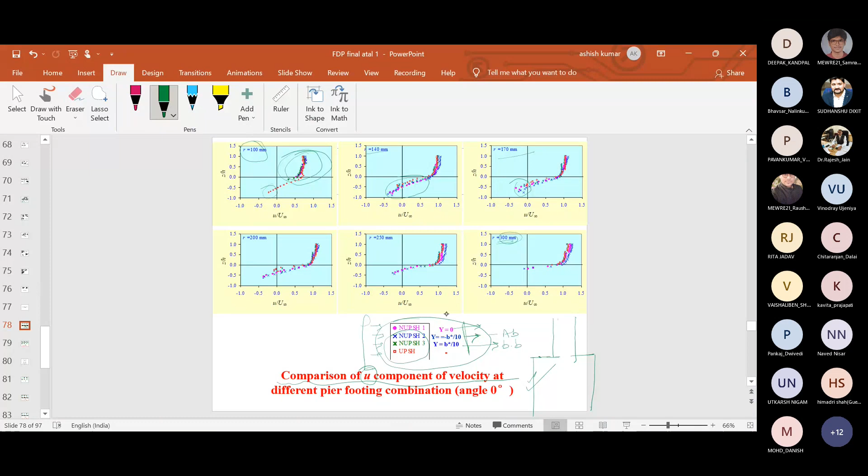And as you are moving away, we have taken up to 300 millimeters here, which is coming into the scour hole. So what we are getting is that as we move away from the scour hole, the negative or reversal flow gets decreased.

Now similarly, we have not taken the V component here, as we are not getting significant change in the value of V component, while the W component is more significant, as that is basically contributing towards the vortex formation.

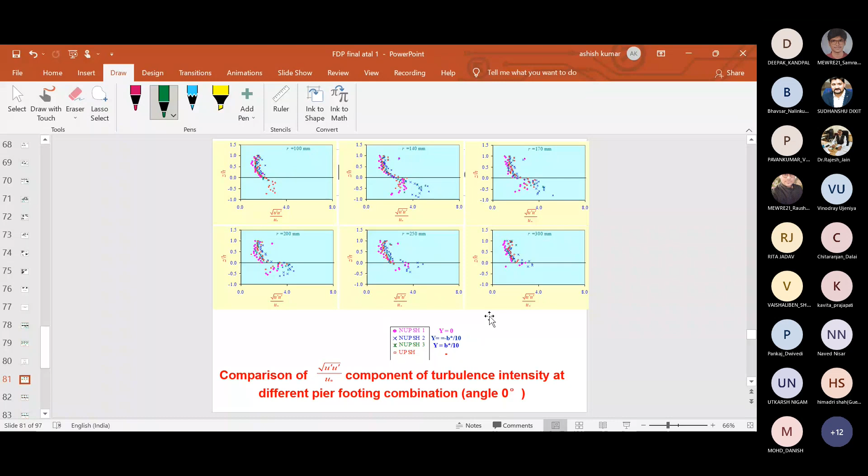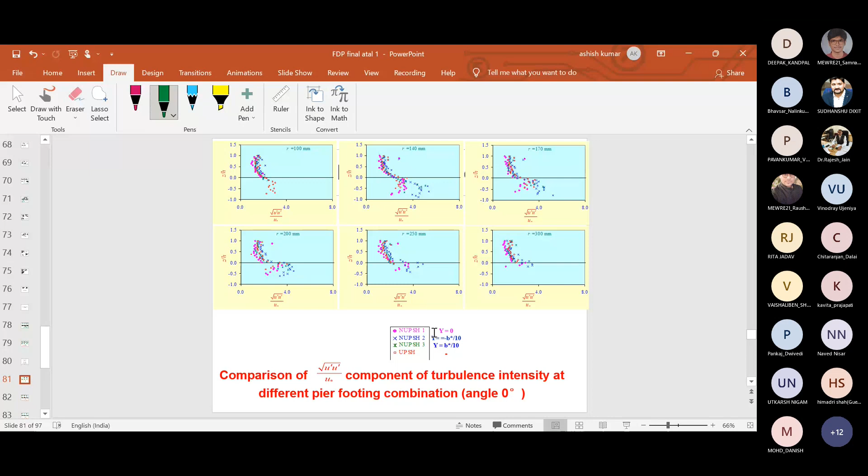Again, here we have shown the comparison of the U component of the turbulence intensity at the plane of alpha equal to 0 degree. So again, the turbulence is shown where the top of the footing is exposed. So here these are the values.

So this is the V component here, and similarly this is for the W component. So these are all the turbulence components for all these 4 cases, and comparison has been made.

And similarly, this is at the 180 degree plane, when we are having this wake region downstream. And here you can see that we are getting different results when we compare it with the results of the upstream of the plane. So that is what we are having here.

So here you can see that this is again for the uniform pier values. Behind the pier, if you see this value, this is for the uniform pier scour hole. For all others, we are not observing this value in the scour hole area, in the wake region, because we are having the top of the footing for all these values. So the scour hole did not allow development in that area.

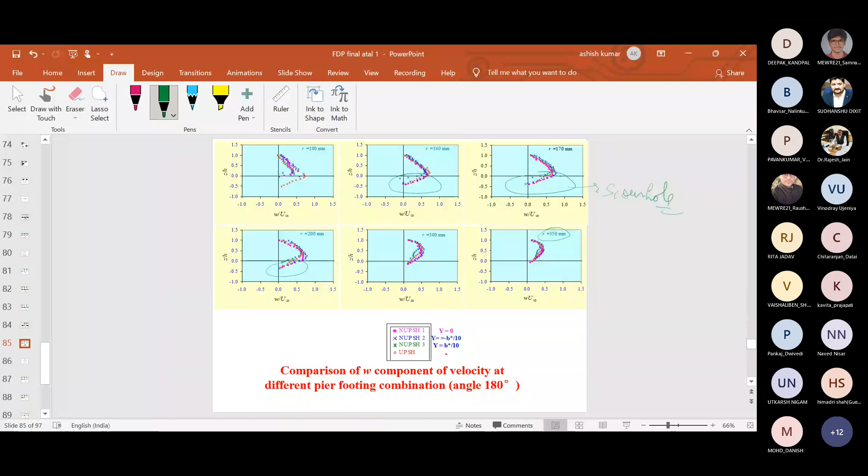Here what are you getting? So here you can see that the W component is here. What is the value here? W component is positive here.

And what does a positive value of W indicate? That W is positive means the motion is in the upward direction. So here in all cases we are getting positive values. Also you can see that in all cases when the footing is exposed, we are getting a higher magnitude of the W component, either W or V.

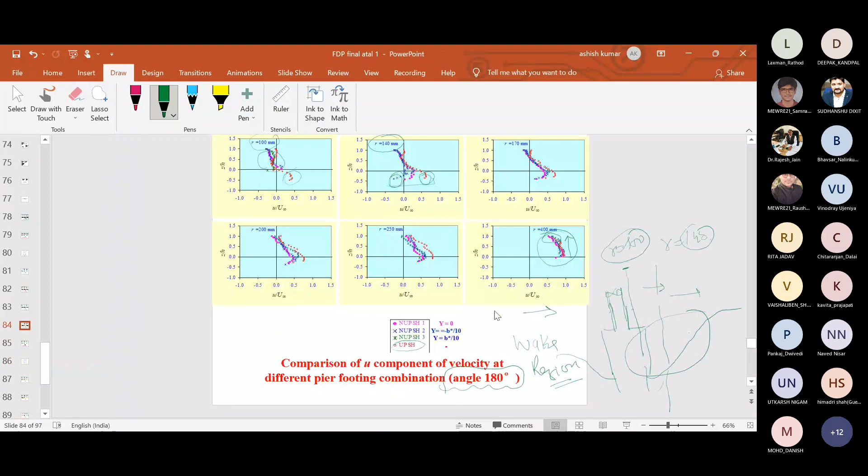Now this is again a representation of these two figures, and only selected figures have been taken, only for this U component.

Now this is the comparison of the fluctuations in four cases. You can see that no conclusive trend was obtained from this. Almost in all cases, when our footing is exposed, we are getting more turbulence, while we vary and capture the data at different radial distances.

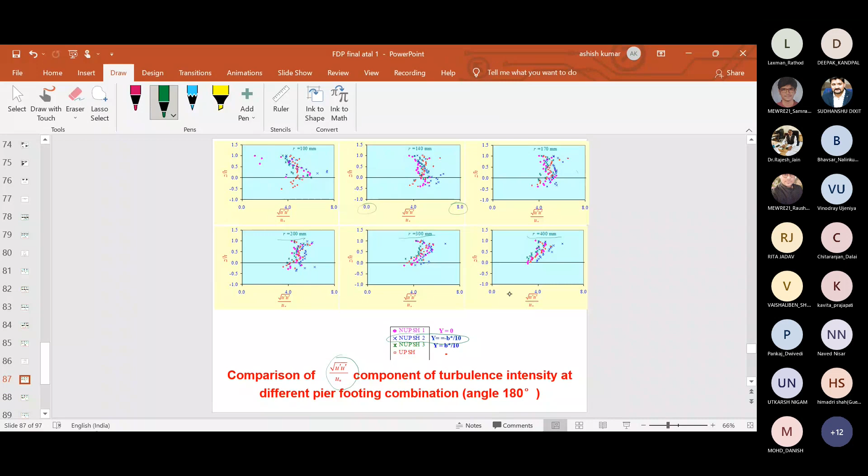Now this is for the V component. Again, you can see that at the 180-degree plane, the fluctuation intensity is a little bit more compared with the U component. Here the magnitude varies from scale 0 to 8, while for V the magnitude varies from 0 to 18, which shows how the V component has fluctuations in magnitude.

Also, this is the W component here, and you can see the trends we are having in the flow structure.

So now coming to the end of the flow structures we have discussed. So now something a little about computational fluid dynamics. This is the results we have taken here.

These are experimental results, but as we go with the literature, we see that simulation of flow structures in the scour around a pier is also reported by several researchers, and the names are indicated here. Most of them have used the Reynolds Averaged Navier-Stokes models, known as RANS.

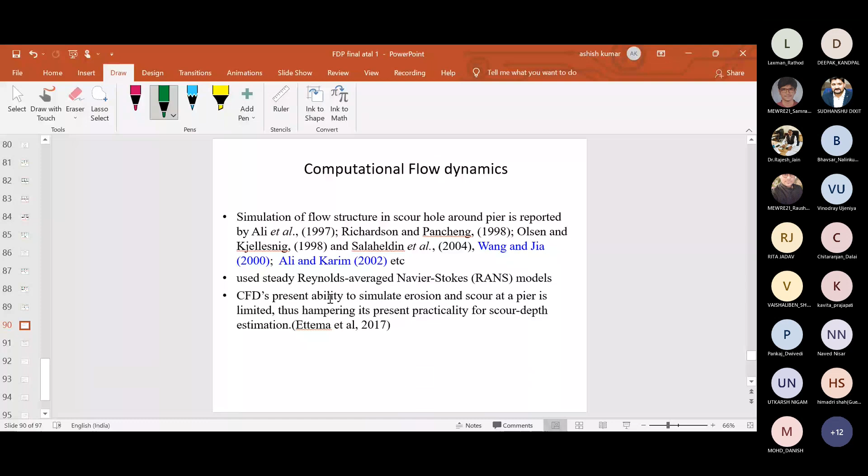So if we talk about computational fluid dynamics, the present ability to simulate erosion and scour at a pier is limited, thus hampering the practicality of this scour depth estimation. However, some attempts have been made, and in some cases we get good results, but still there is scope to work in the field of computational fluid dynamics.

So those are all the references which you can refer if you want to do some more research in that area. And with these words, thanks to all of you for the patience, listening and the questions in between the presentations. I also welcome any questions or queries, although I have taken a little bit more time.

Good afternoon sir. Sir, there's a reference you mentioned, Breusers and Raudkivi, the book Scouring from Balkema publication. I have tried finding that book online, but is it available in PDF format, sir? I think that book is available online, you can purchase it, or otherwise you can visit the library in the Department of Civil Engineering at IIT Roorkee. We have one such copy there, and I referred to that copy.